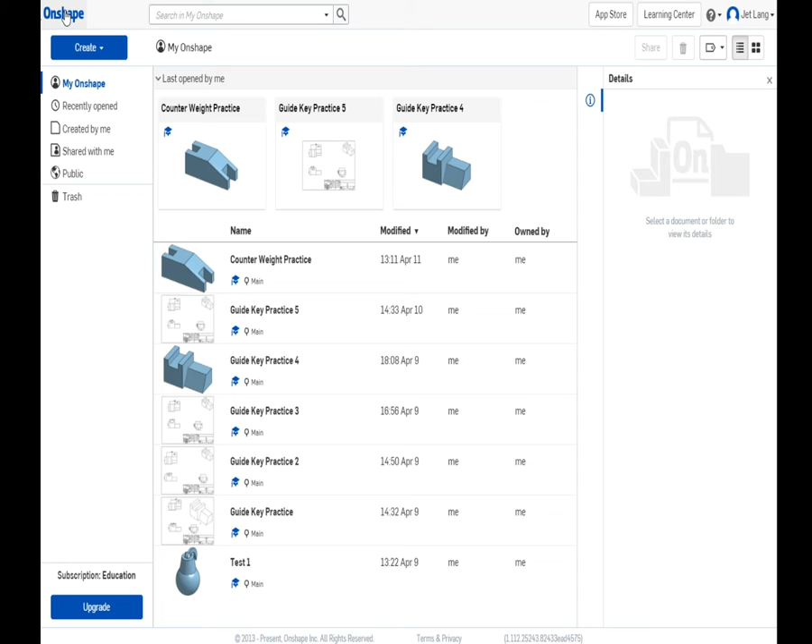Welcome to Onshape. What you want to do is go over to your Create document underneath Onshape. Press Create and then choose Document.

Name it whatever you want. For this, we are just doing a guide key. So you want to type in GUIDE space KEY. Press OK.

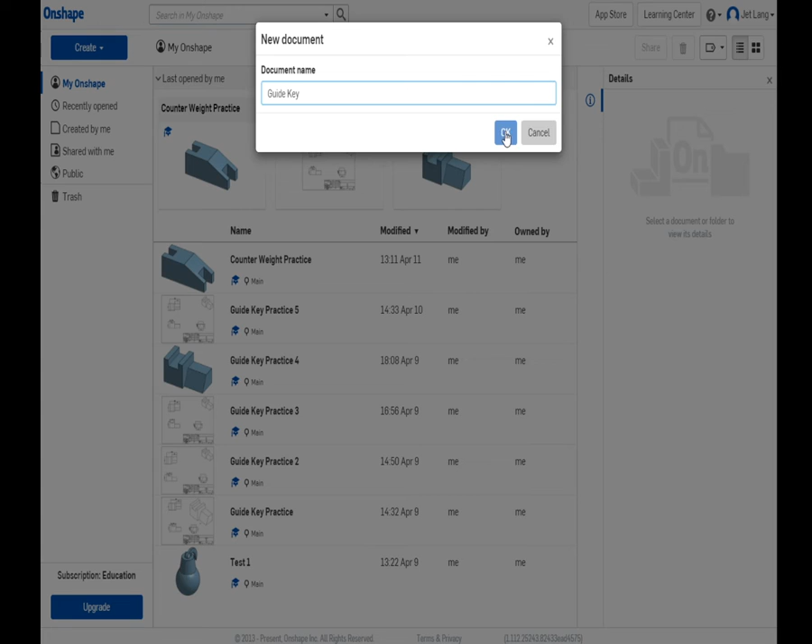Now that you're going in here, you might notice it might be automatically set to a certain dimension, which you won't want.

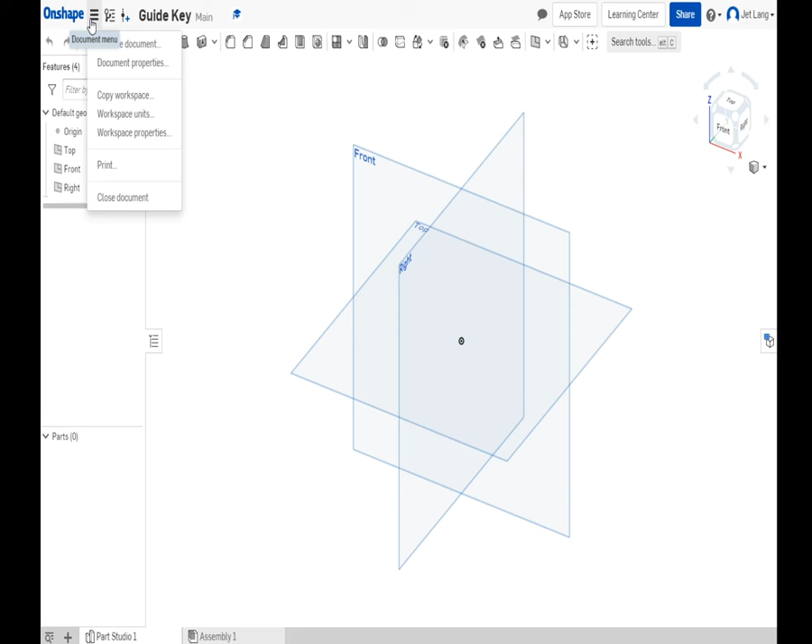So you want to go over to Workspace Units beside the Onshape document, also known as the Document menu. Click on Workspace Units. You are able to change the unit you're working with from millimeter to foot, but for this, we are working with millimeters. You do not have to change anything else here, since we are only working with millimeters today.

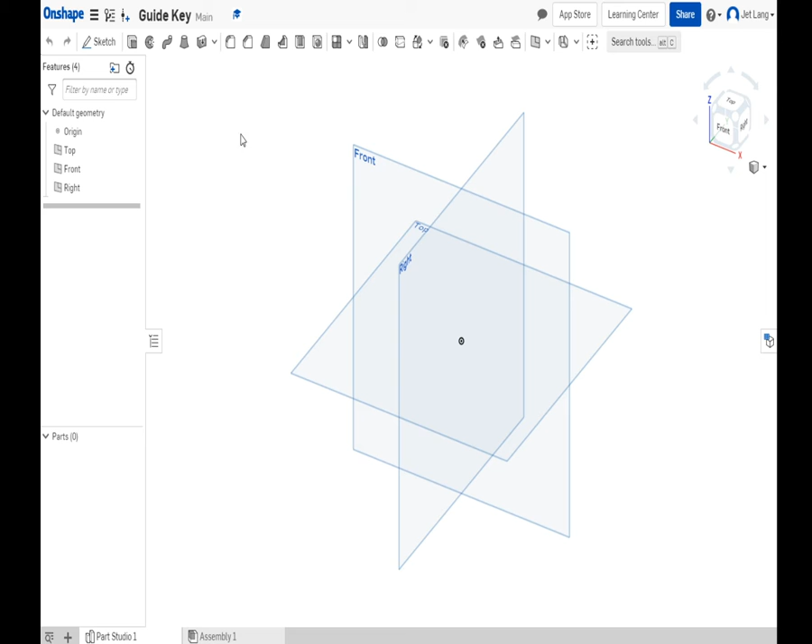So what you want to do after that is now press Sketch. Then select one of the planes that are shown right here. What we're going to do is select the front plane. Double-click the small cube over here with the word front on it to select the front view.

Now, go over to this hotbar up here, filled with all sorts of lines and shapes. Click the Line tool. Then go ahead and select your center point. You want to go up 51.5 millimeters.

Once you select that, it does not have to be perfect. Just put the line somewhere on the line and then type in 51.5. If you're having issues, it's because you have to do it after you've selected the second point, and then you want to press Enter.

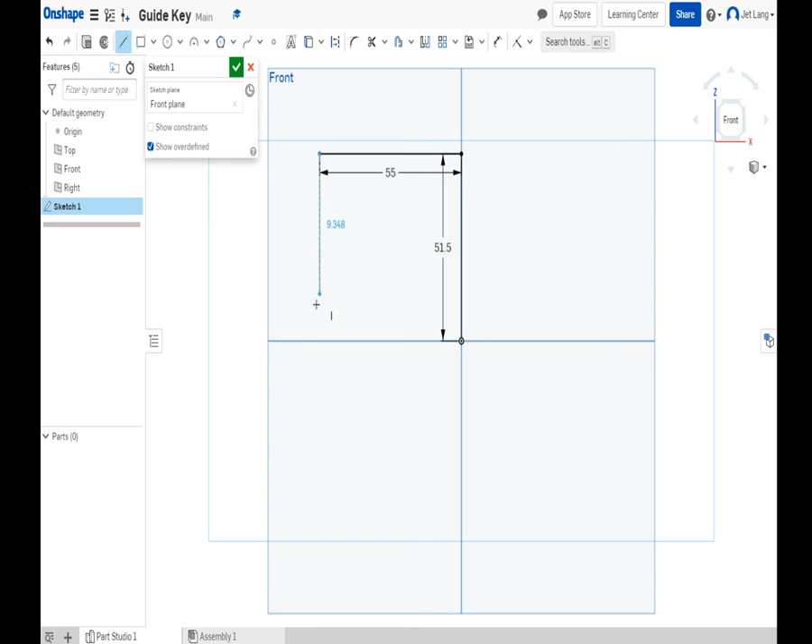Then after that, you want to go over 55 millimeters. And then if you haven't already noticed by now, you just go back down till you select this line and then go over once again. Now we have our square, or rectangle.

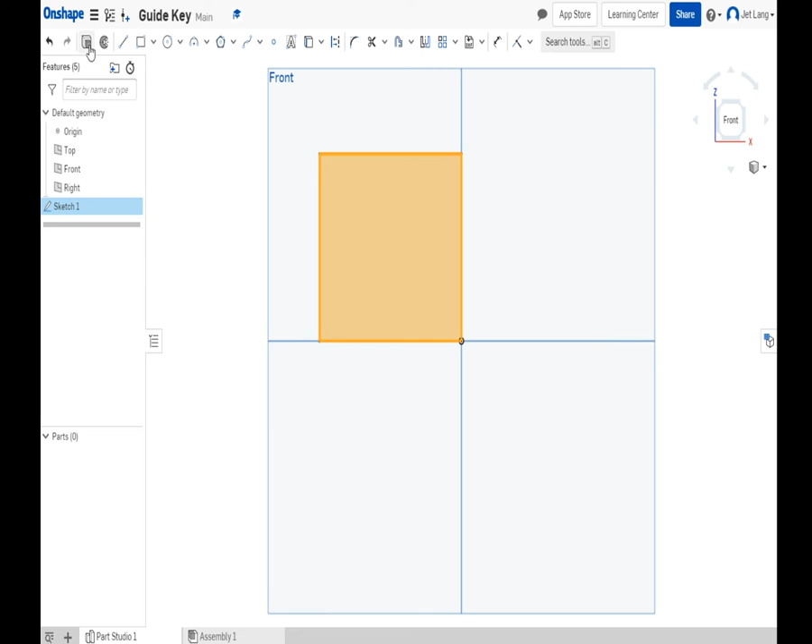Once you've connected all of the lines, go over to the extrude that is near the line tool. Click on the extrude, and for this, left click and angle it, or right click, sorry.

Then what you want to do is select the depth of the face. And what you want to type in here is 57. You don't have to put the millimeters, all you do is have to press the enter button. Voila. After that, you press the check mark.

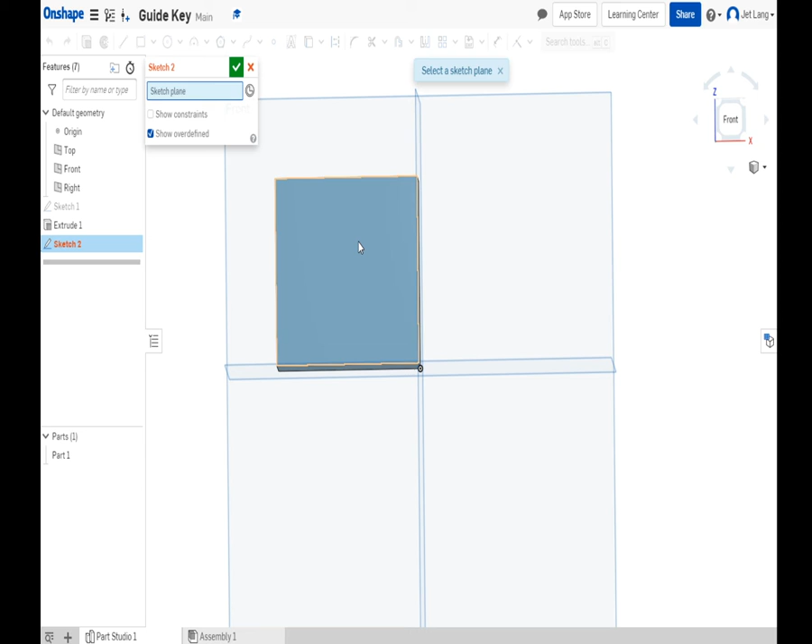Then go ahead and press the sketch button once again. Click on the front of this newly created cube you had. Go ahead and select your line tool. Then select either of the top corners of your little rectangle.

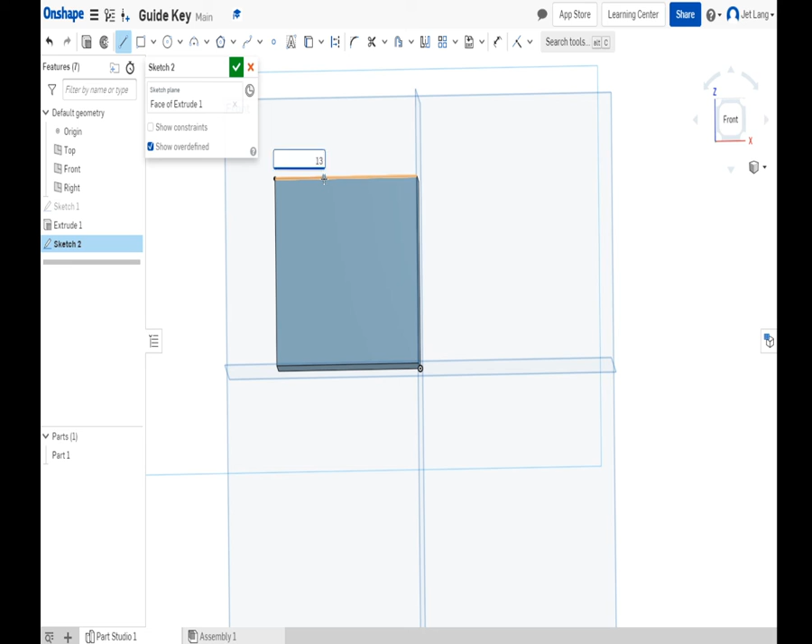Go over 13 millimeters. Then go down 13 millimeters. Then go over 29 millimeters. Then go up and complete your rectangle.

Make sure there is no missing connections, or this won't work the way you want. You do not have to put the other line on the other side, but if you want to, you may go ahead.

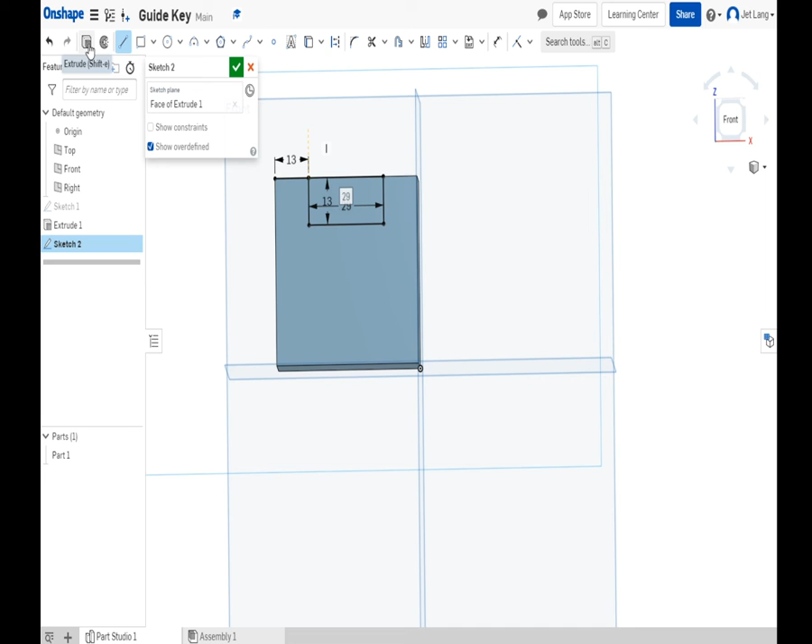Once you've done all of that, press the extrude once again. And instead of adding this time, you want to go ahead and click the remove.

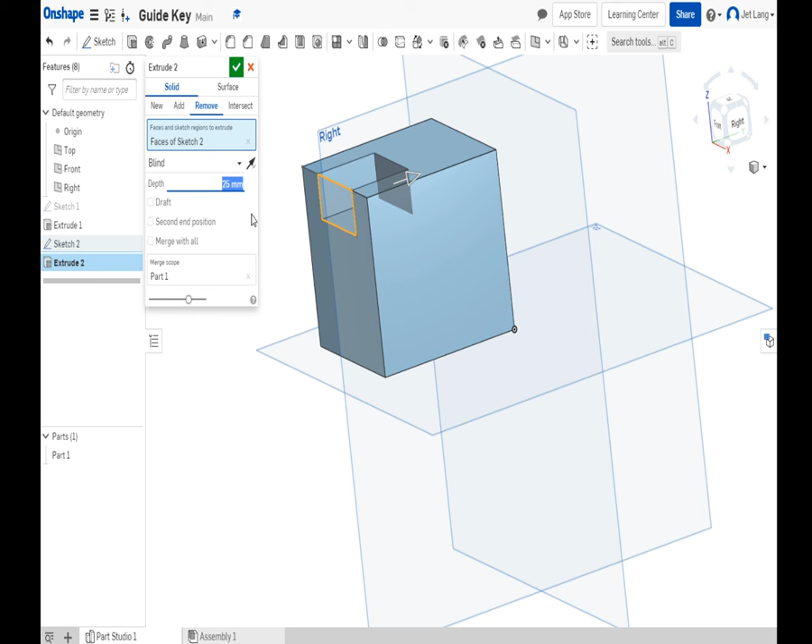As you can see here, now we type in the same number that gave us the length of our rectangle, which is 25. Enter. And once you've done that, click the green check mark. And what you should have is this, a rectangle with now a missing part that looks like a guide.

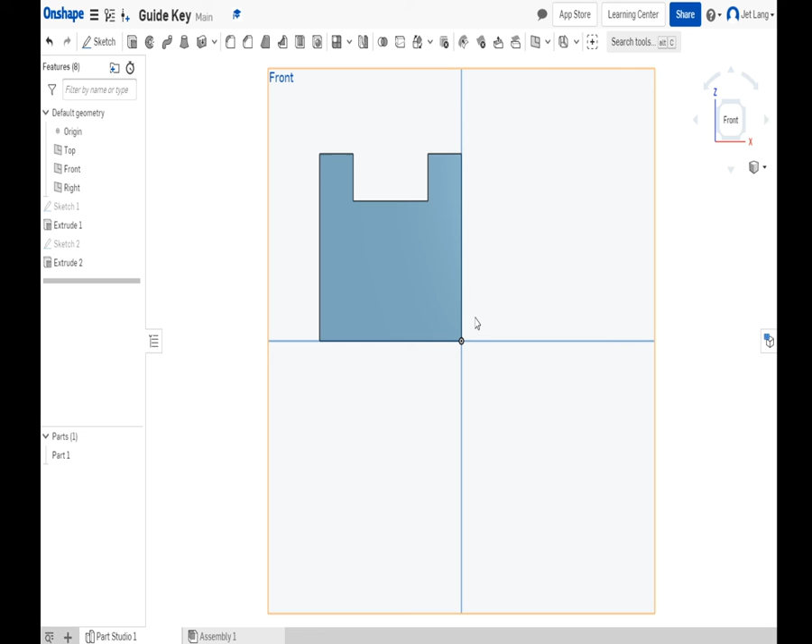Once you've done that, go to the right side of this newly created shape and click on the side of your shape. Go ahead and select the line tool.

For this, you want to select the center point again, and then go ahead and go up 32 millimeters. And this over here doesn't matter how far you go. Just make sure you don't select all the way over here because that's not going to work.

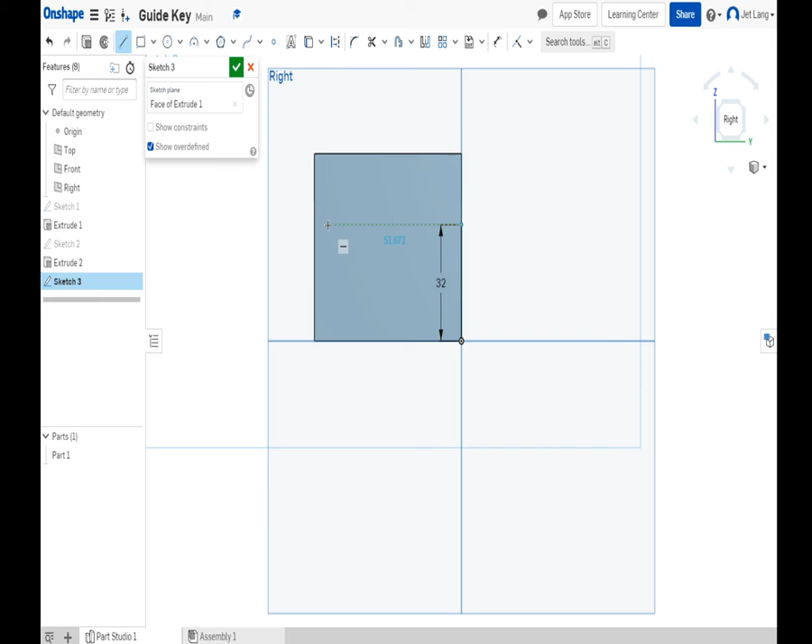Select here, go at it at an angle, and then the bottom line you're going to make into 47.5.

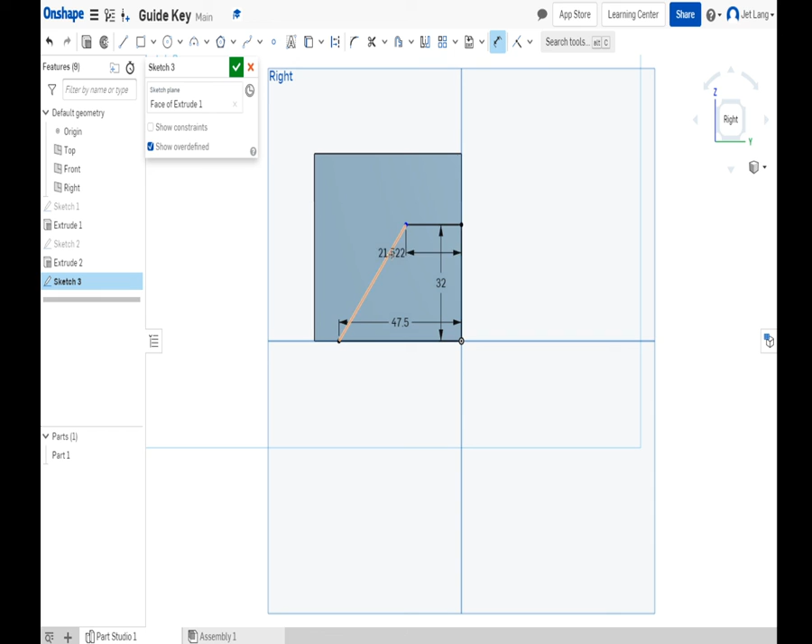Then after that, you're going to want to go up to your hotbar again, then go over to the tool that says Dimension. Click on that. In order to get the 60-degree angle that your drawing should have, you want to select the top line and then the hypotenuse. And then go ahead and make this degree 60. Press enter. And this is what it should give you.

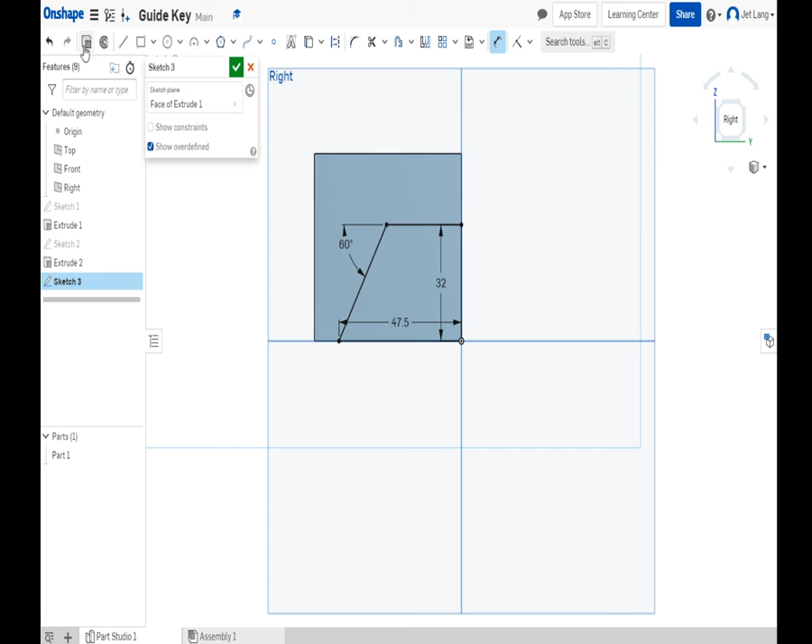Once you've done that, go over to the extrude. Click extrude once again. Since you're continuing to be on add, do not remove.

Now you want to add about 54 millimeters, sorry. Once you've done that, it should look like that. Now, once you've completed that step, press the check mark once again.

Congratulations, you have now completed the very first step of your drawing.